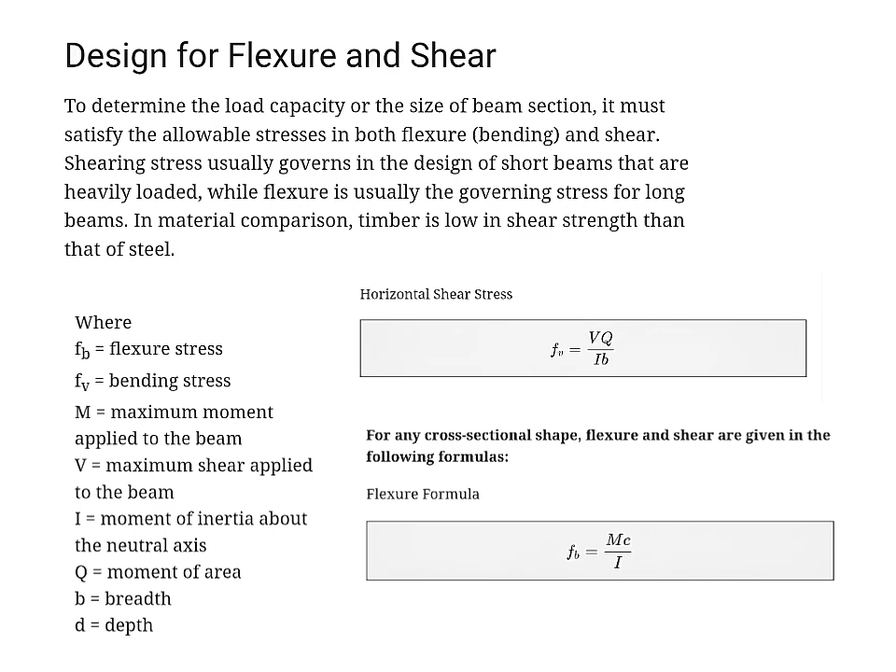Itong dalawang equation na to, ginagamit siya para ma-check kung kakayanin ba ng beam natin yung mga forces, o kung safe ba o may tendency na mag-fail dahil sa bending o shear.

Sa example na napili ko, ang i-analyze natin ay isang structural beam na may load para makuha natin yung stress ratio, specifically yung maximum flexural stress at maximum shear stress. Importante tong topic na to sa mechanics of materials, lalo na sa structural design and analysis, kasi dito natin makikita kung alin ang mas dominating stress, yung bending ba o shear.

Sabi sa problem, meron tayong wide flange section, yung parang I-beam na may uniformly distributed load na pounds per foot, at nakaspan siya sa beam length na L feet. Ang goal natin is i-compute yung ratio ng maximum flexural stress over the maximum shear stress - in short, kung gaano kalaki yung bending stress compare sa shear stress.

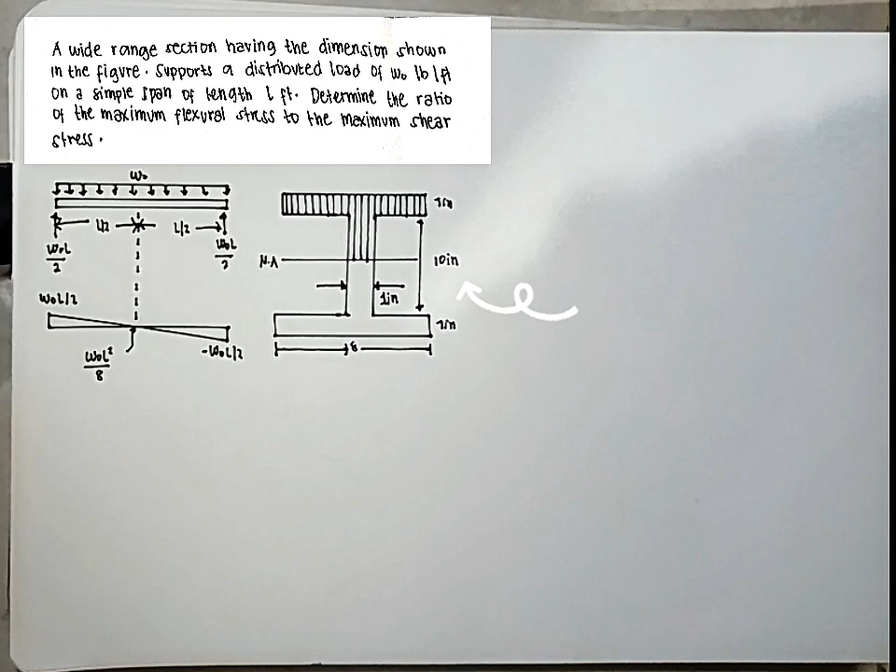Sa section drawing natin, ang nakalagay ay dimension ng wide flange beam. Meron tayong flange width, yung 8 inches, yung flange thickness naman is 1 inch, web height is 10 inches, yung web thickness natin is 1 inch. Take note, yung flange natin is yung top and bottom horizontal part, yung web naman is yung vertical part sa gitna ng I-beam.

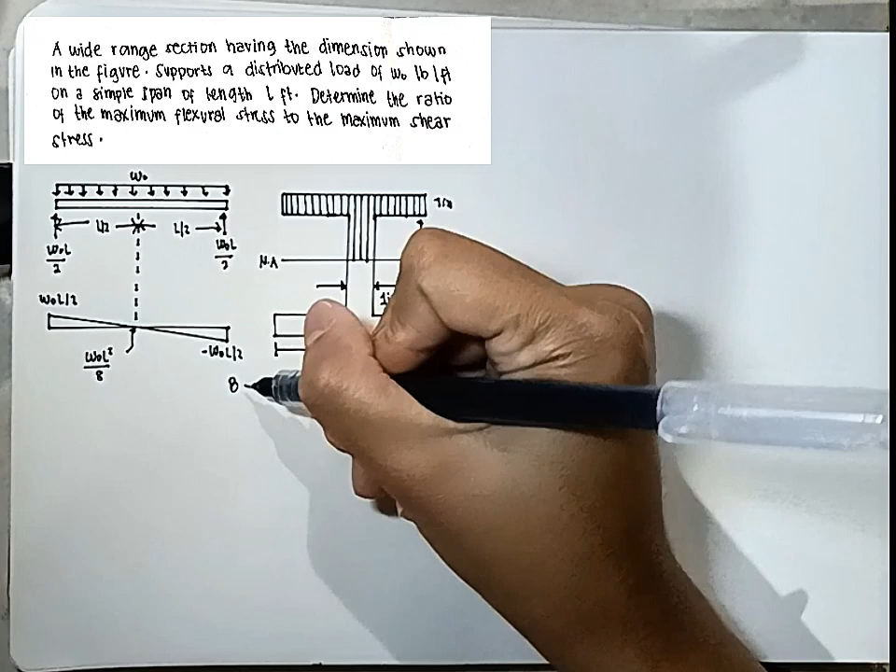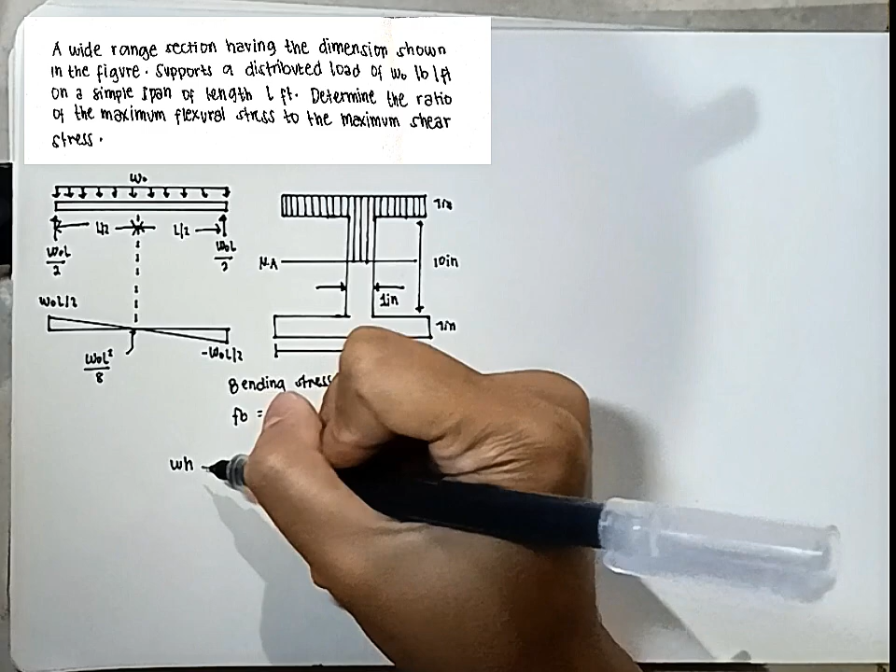Dito na tayo sa pagkuha ng maximum flexural stress, gamit ang bending stress formula na FB equals to MC over I. Kunin muna natin yung maximum moment na na-apply sa beam. Dahil ang beam natin ay simply supported at may UDL na W0, ang formula na gagamitin natin ay yung M equals to 1/8 W0 L squared.

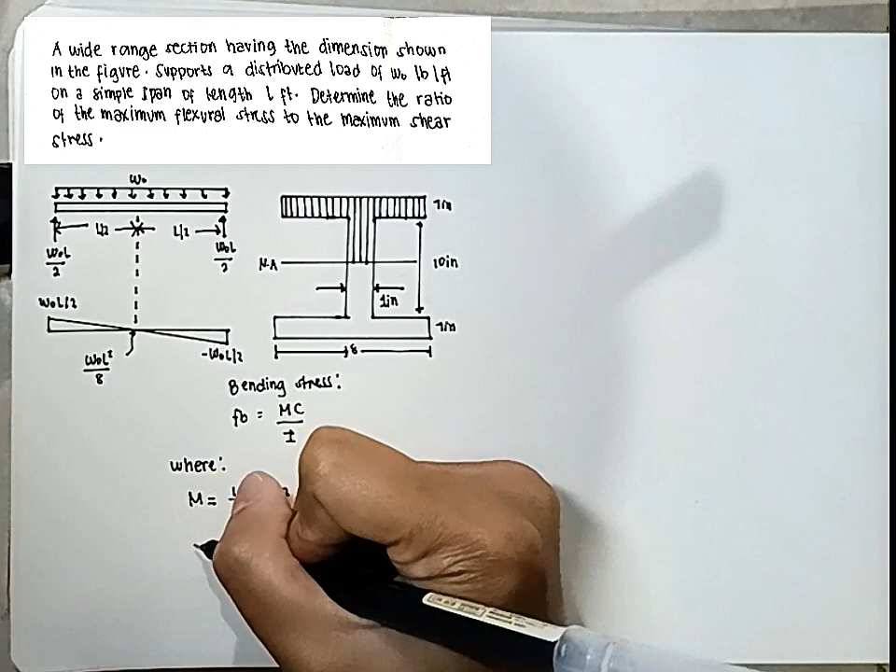Next, dito makikita natin sa drawing na yung neutral axis o NA ay nasa kalagitnaan ng section. Next na kukunin is the distance from the neutral axis to the extreme fiber, meron tayong h over 2. 1 plus 10 plus 1 equals 12 inches yung total depth ng I-beam. So C equals to 12 over 2 equals to 6 inches. Yung C natin is 6 inches.

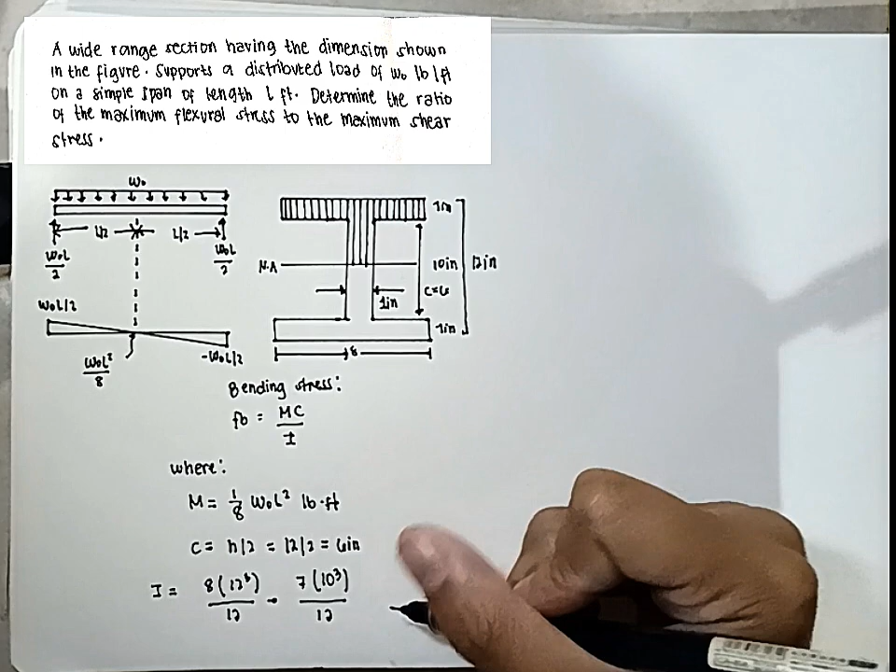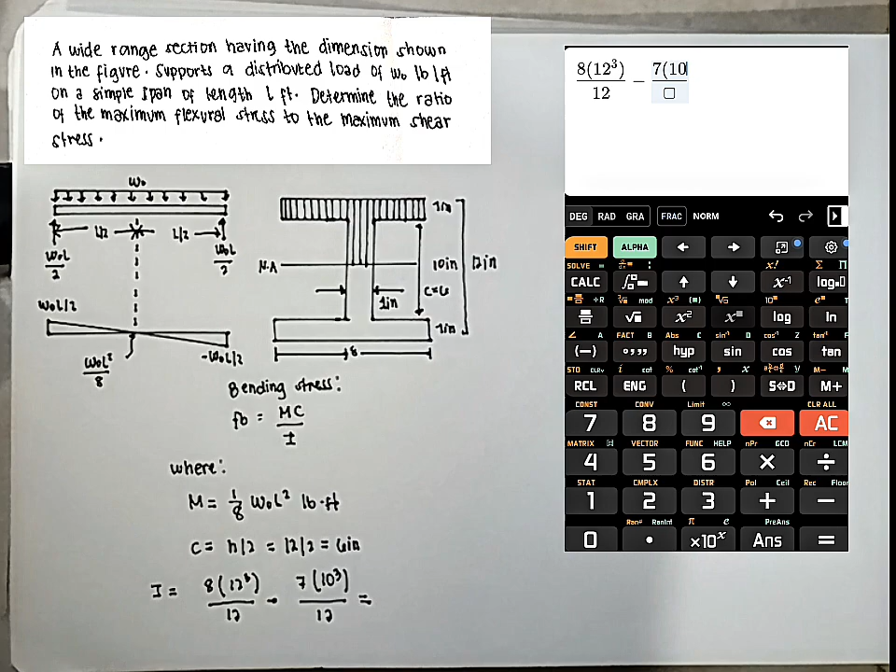Ang next na kukunin natin is yung I, the moment of inertia. Para sa moment of inertia, gagamitin natin yung formula na BH cube over 12. Since symmetrical naman yung beam, kukunin natin yung flange and web separately, then subtract. So B is equals to 8, then height is equals to 12, so 8 times 12 cube over 12, minus 7 times yung inner niya is 10 cube, then over 12. Yung 7, nanggaling siya sa base ng flange, yung 8, then minus sa base ng web, yung 1, so 7. Yung 10 naman is yung inner height ng ating beam, which is yung web, so 7 times 10. Ang sagot natin ay 1,706 over 3 inches raised to the 4.

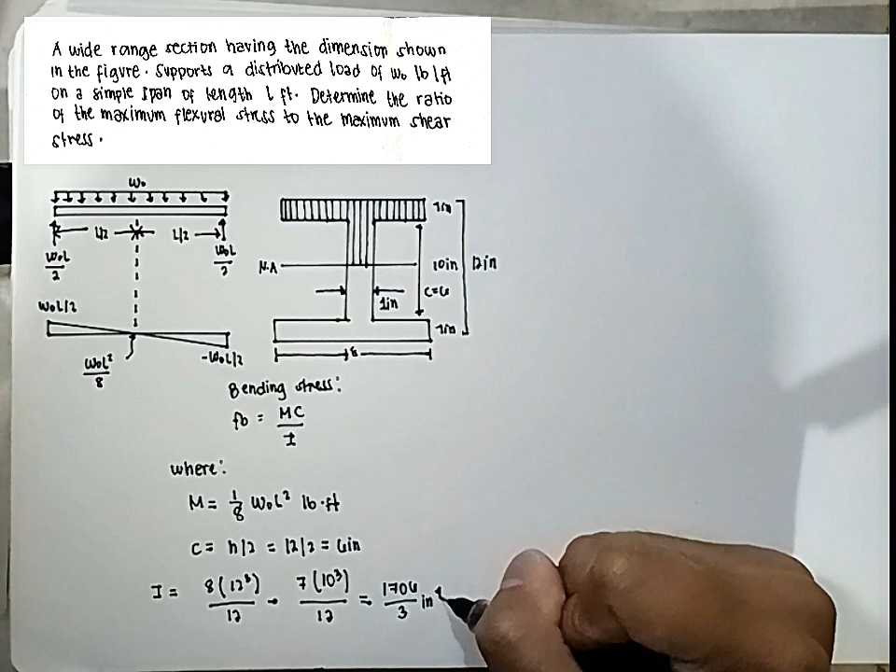Ngayon, pwede na natin isolve yung maximum flexural stress o yung bending stress. Yung formula niya is FB equals to yung M is 1 over 8 W naught L squared pounds foot, times C, yung 12 over 2 natin equals to 6 inches, over the moment of inertia, 1,706 over 3 inches raised to 4. Nakalimutan din palang i-include, dapat may 12 tayo na i-multiply sa moment para ka-consistent ang units - kailangan natin i-convert si moment from feet to inches.

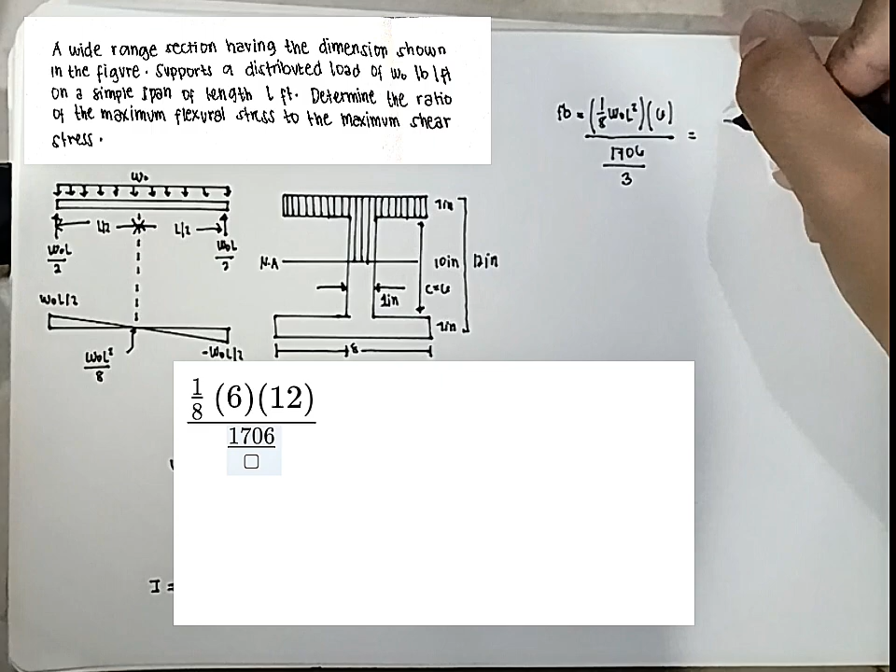FB is equals to 27 over 1,706, then copy the W naught L squared since wala siyang value. Ngayon, nakuha na natin yung bending stress.

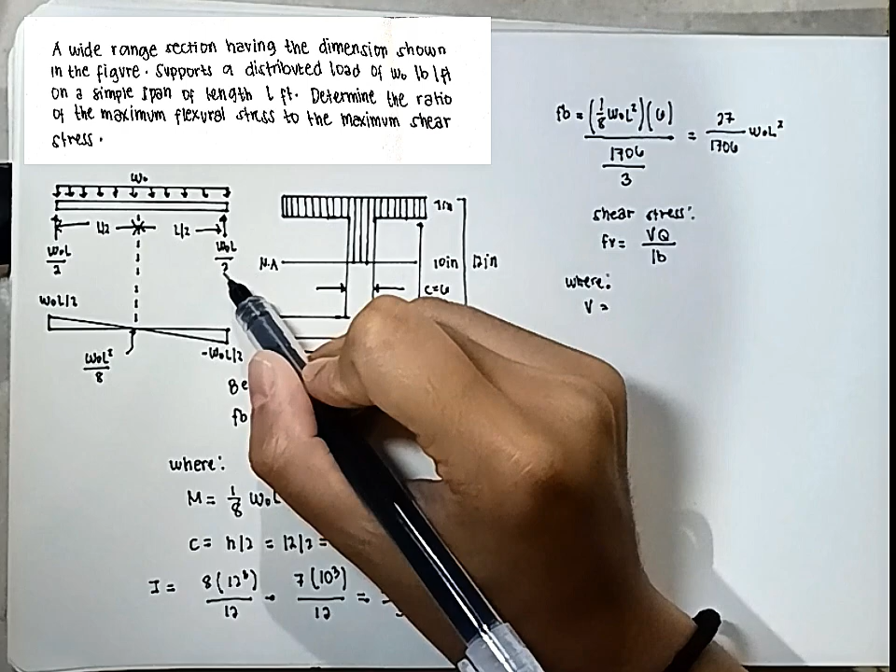Kunin naman natin yung shear stress gamit ang formula na FV equals to VQ over IB. For the shear stress, meron tayong V - yung V is equals to shear force at support, yung maximum shear in simply supported beam. Yung V natin is 1/2 W naught L.

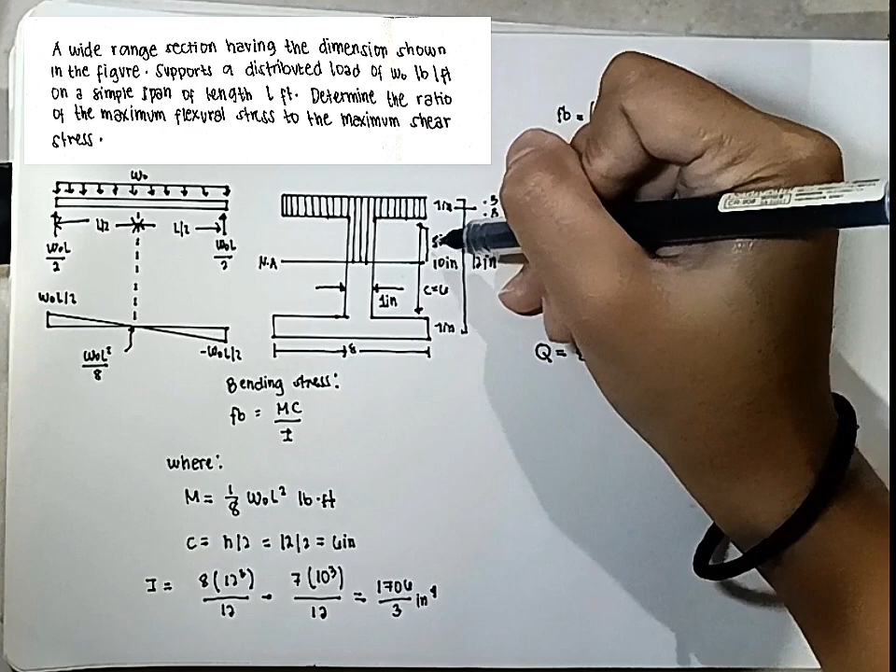Yung Q naman is equals to first moment of area above o below the neutral axis, depende sa reference. So top flange, yung 8 times 1, at kukunin natin yung kalahati ng web, yung height nun, yung 10, then equals to 5 inches. Yung half ng flange is 0.5, then ipag-add mo yung half ng web and flange is equals to 5.5, so times 5.5, plus yung web area above NA - 5 times 1 is equals to 5 inch square, at yung centroid naman is 2.5 inches from NA.

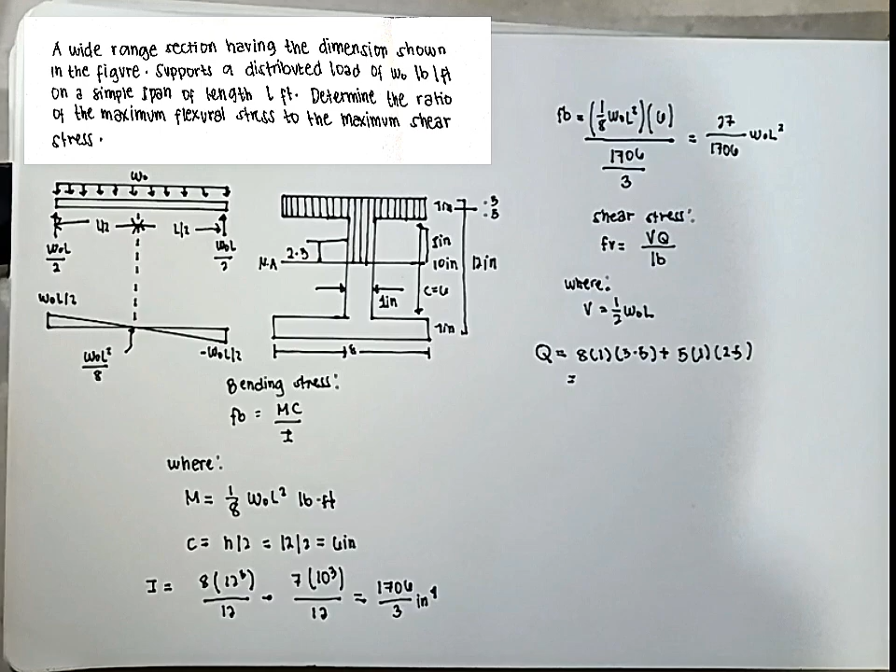Ang moment area natin ay 56.5 cubic inches. Yung moment inertia natin, still 1,706 over 3 pa rin, same sa bending stress. Yung base natin sa web is equals to 1 inch.

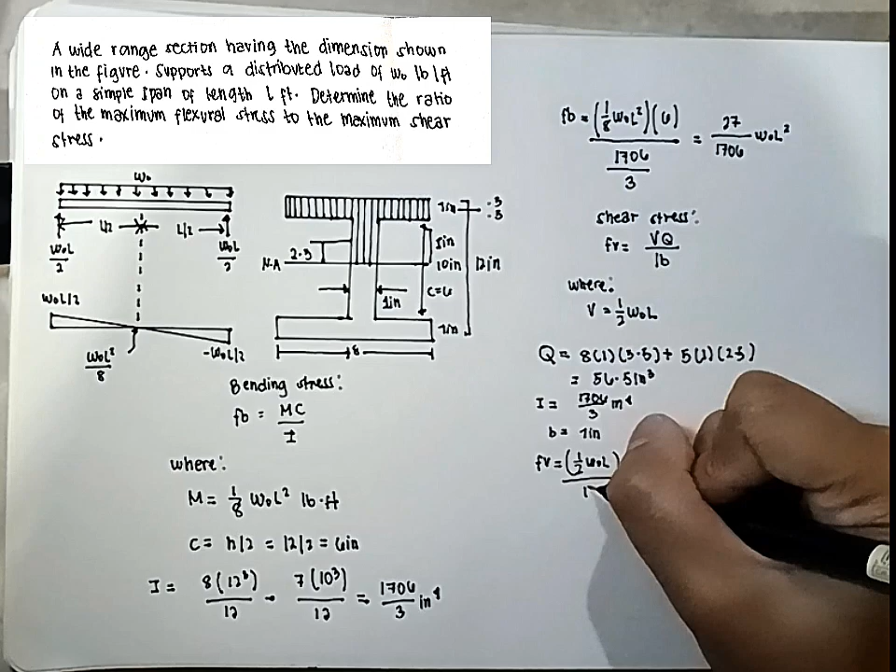Pagkatapos, isa-substitute na natin, gagamitin natin yung formula ng FV. Yung V natin is equals to 1/2 W naught L times yung moment area natin, 56.5 cubic inches, over yung I natin is 1,706 over 3, then yung base natin is 1 inch. Yung shear stress natin is equals to 339 over 6,824 W naught L.

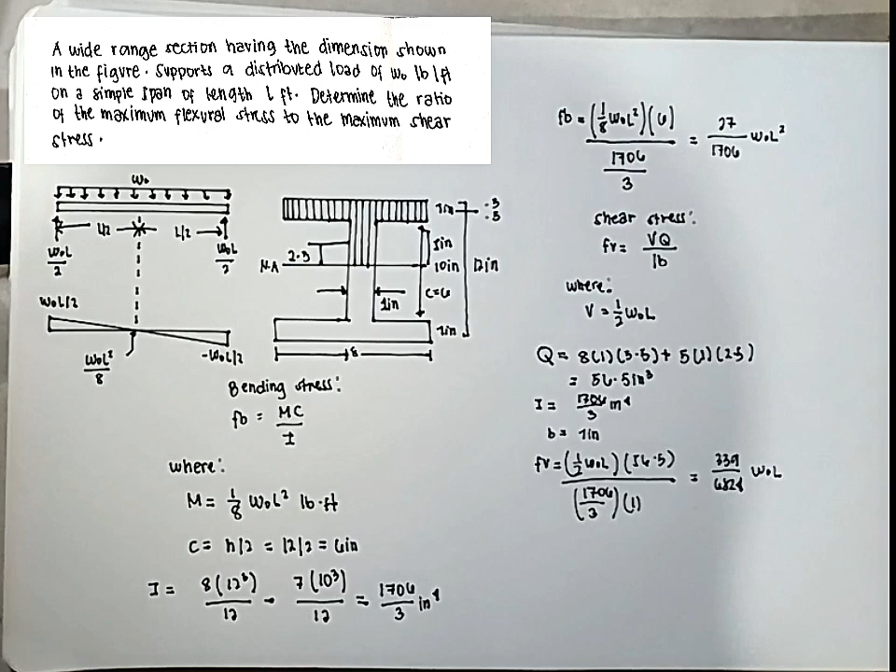Ngayon nakuha na natin yung FB and FV, pwede na natin kunin yung ratio na hinahanap. Ratio is equals to flexural stress o bending stress over the shear stress.

Yung bending stress natin is equals to 27 over 1,706, over yung shear stress natin ay 339 over 6,824 W naught L.

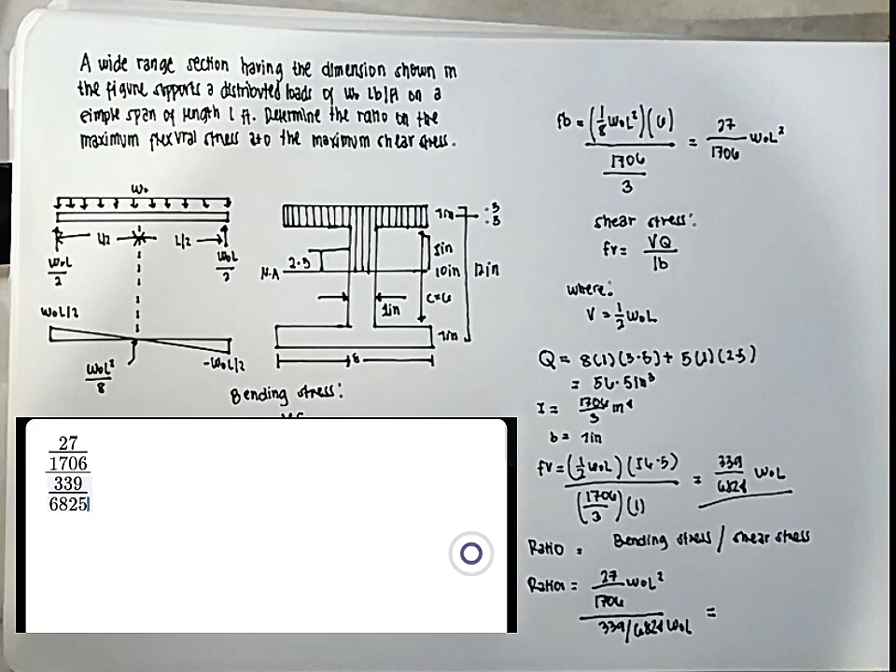Para sa ratio, ang sagot natin ay 36 over 113. Cancel the W naught and the L - since naka-L squared siya, L na lang matitira. Ang final answer is 0.3186 L.

That's all for my discussion about the design for flexure and shear. Thank you.